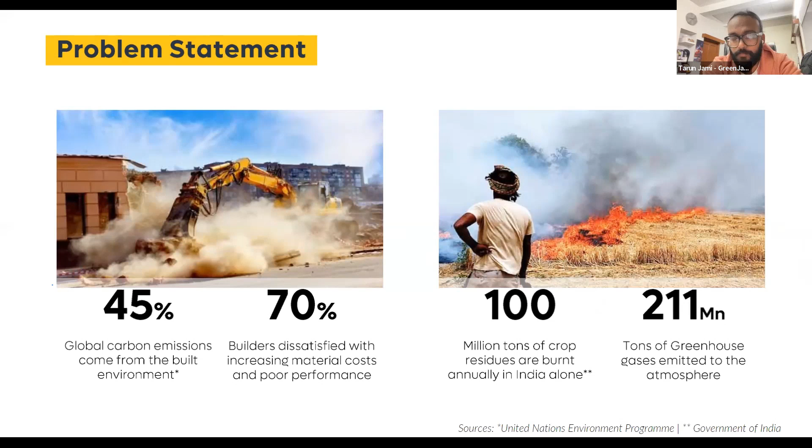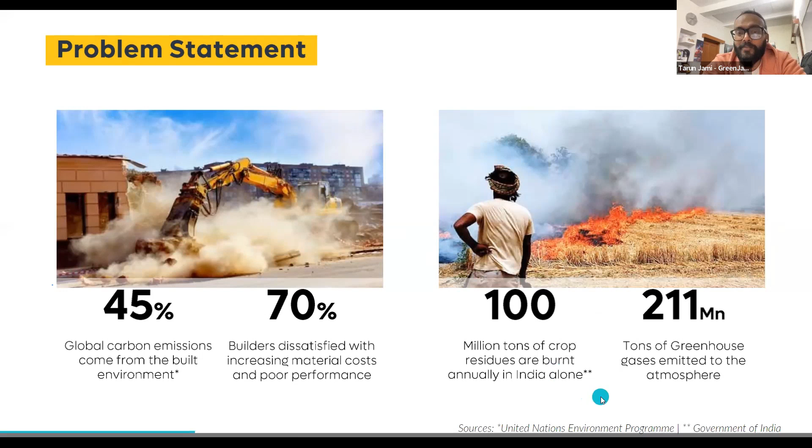So to overcome both problems, we created one solution. We call it Agrocrete. It's a carbon negative building material made using crop residues and the non-toxic, non-hazardous byproducts from steel and paper manufacturing. The background of this slide is a shot from our own manufacturing unit in Roorkee, which was made using Agrocrete blocks. I'll talk about it in the next slides.

So what really is Agrocrete? As you can see, it's available in the form of blocks. What we're putting out in the market are these hollow blocks. They have a cavity within, and they're used for both load-bearing as well as non-load-bearing applications. When you look at high-rise and even low-rise constructions these days, because of heightened awareness, quite a few people are choosing AAC blocks. But they come with a whole host of disadvantages—you have cracks in the walls, you have to treat them well, you have to put these tie beams after every 4 courses, even though it's a non-load bearing application. We're essentially overcoming all of those problems at significant advantage.

One, the strength is significantly higher than 5 MPa. We consistently achieve 7.5 MPa for a hollow block, which is basically in load-bearing territory. And then we have the load-bearing varieties, which achieve more than 10 MPa in strength. But the biggest advantage is in terms of the U value—at 1 watt per meter square Kelvin, it's best in class for a 200 mm thick wall.

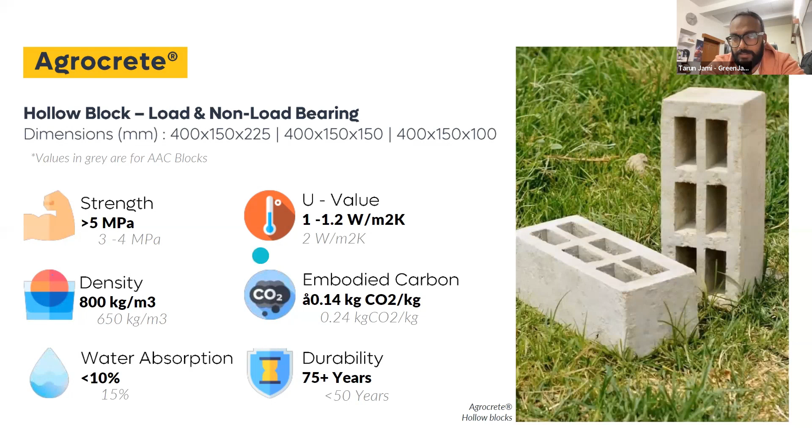So in quality, you're looking at how the construction is done, how the manufacturing is done and how you're keeping it consistent so that you're achieving the same properties, the same parameters. And we're able to achieve that because we use automatic machines where everything is controlled in a factory. We ensure that the exact amount of raw materials are going into it, and therefore the final product is also the exact same.

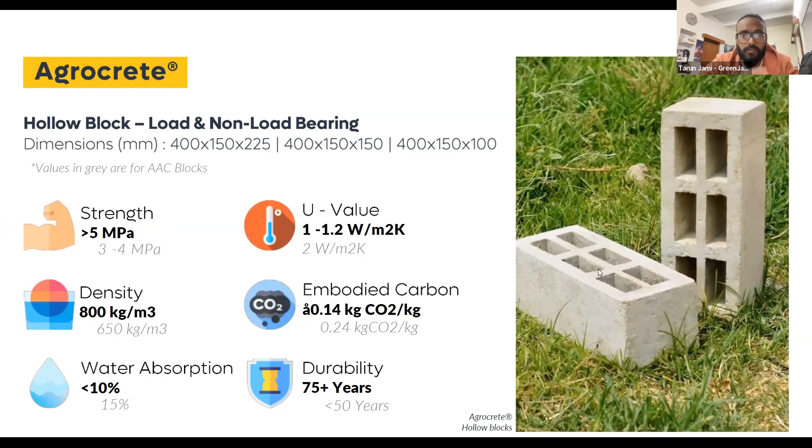We've perfected the technology to a point where it doesn't matter what sort of crop residues we're using. We could use paddy straw, bagasse, cotton straw, corn straw, a whole list of crop residues available to us right now. When it comes to the technical parameters, Agrocrete satisfies the requirements of IS 2185. In fact, it surpasses it. We've benchmarked it against IS 2185 Part 2 and Part 3. Part 3 is for AAC blocks, but that's the most relevant standard that is available to us.

At this point, we're also benchmarking Agrocrete against certain international standards. It's a product made for the globe in India. So we're looking at BS 5234, ISO 7292, and so on. Right. So that's the customer value proposition. The reason anyone picks up Agrocrete over conventional materials is one, because of the larger block sizes, which translate to lesser number of mortar joints.

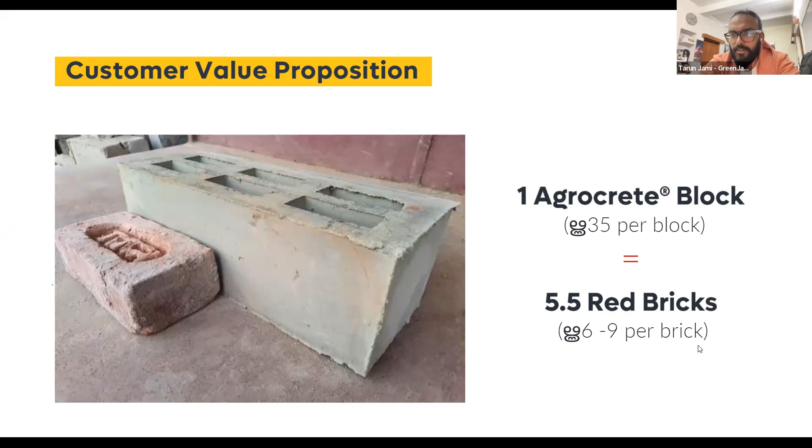And because it's a cavity block, the amount of mortar that you apply onto the outermost face shell is significantly lesser than the amount of mortar you would apply to the whole surface of a solid block. And again, because of the larger block sizes and easier handling, the amount of labor required to make the wall is actually quite lesser. And all of this translates to the next slide, please.

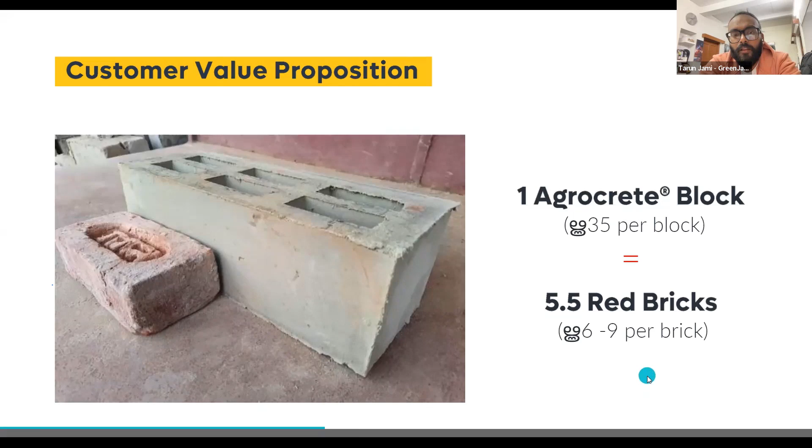So all of this translates to lower cost of construction, up to 50% actually. And so how, is a question, right? So when you look at one clay brick wall, a square meter of it would cost around 2,250 rupees. And this includes the cost of the bricks, the mortar that you put in, the labor that you require, the higher thickness of plaster that you have to apply. All of these things included, even a base coat of paint, that turns out to be around 2,250 rupees.

The same wall, the same thickness, everything with Agrocrete is just 1,250 rupees. So it's almost 50% cheaper. In the future, we're looking at entering the voluntary carbon markets, after which we would be able to transfer some of those benefits, unlocking another revenue stream through the voluntary carbon markets. We'd be able to make this even cheaper.

And beyond it all, because it's a factory-made product, we're also able to achieve customization in the design of the blocks. We're soon introducing interlocking varieties. We're also introducing U-type blocks and so on. All of this while being climate positive, because Agrocrete has a negative embodied carbon.

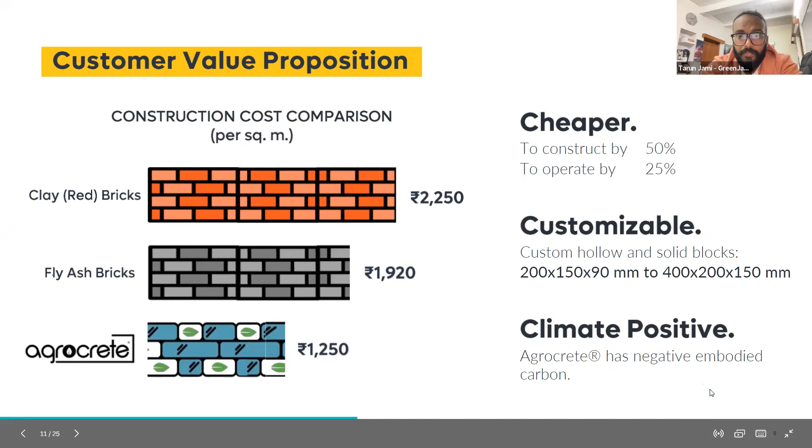The next slide, please. So impact is something that we're very, very passionate about. As you might have noticed from the beginning of the presentation, the reason that we started this company, the reason that we're still passionate about what we do, is simply because of the impact that we're able to drive. For us, it's all about reversing climate change, and you would see that from this particular slide. So one manufacturing unit, which produces about 900,000 blocks per annum, is sufficient to build only about 300,000 square feet of built-up area.

That sort of emissions would occur if you drive a fuel efficient car along the Earth's circumference 463 times. It's a lot of times and a lot of kilometers. Along the way, we're able to achieve 9 out of 17 UN Sustainable Development Goals. The next, please. Is there a question?

Oh, good. All right. So the manufacturing process is actually quite simple. What we do is we first collect the crop residues from the farmers. We chop them up into small particles. And this is where the most critical part of the process takes place. We essentially treat it with hot water.

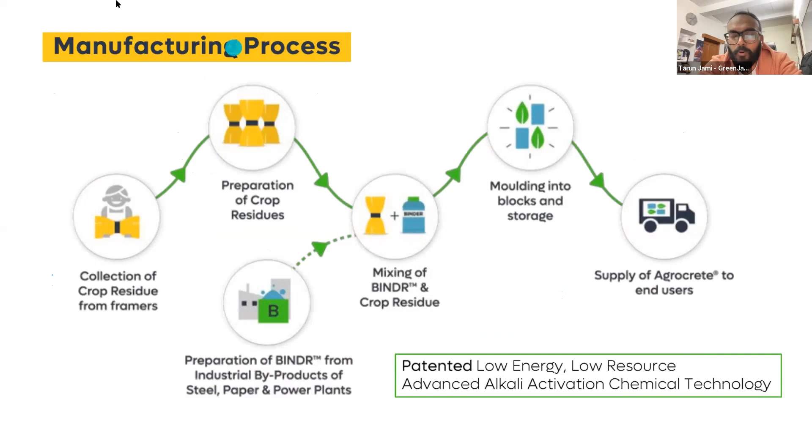And this is extremely important, especially for something like paddy straw, because it comes with a huge amount of fertilizers, chemicals, and pesticides and whatnot, and also a layer of wax which inhibits the setting, the bonding, and everything. So once the crop residues are prepared, we also prepare something called binder in a separate manufacturing unit.

This is a proprietary product by Green Jams, simply made because crop residues and regular Portland cement do not go hand in hand. And we also wanted to avoid the climate impact of cement, which is again very bad. So what we did was we created this amazing ingenious product called binder. It is made from the non-toxic and non-hazardous wastes from steel manufacturing.

So what happens is we basically take the crop residues, the binder, and fly ash, basically any kind of fly ash, be it coal ash, bagasse ash. I mean, there are lots of varieties of ash now available in the market coming from various boiler sources. So we combine all of these three together in a patented mix ratio.

And then we simply compact it in a regular hydraulic block making machine, and we leave it out for a duration of 7 days. There is no heating, there is no water curing, there is no steam curing, no autoclaving, none of those monstrous steps involved.

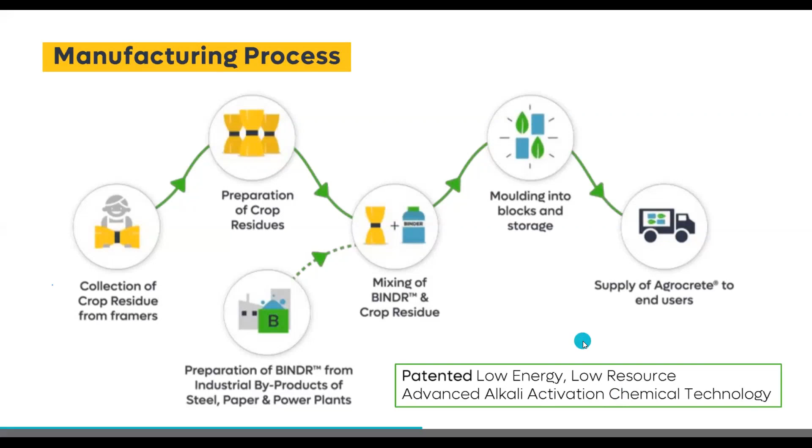Next slide. So yeah, next is a question, Tarun, now that you spoke about manufacturing. Are there any specific construction techniques or skilled labor required for laying out this product on the site? Yeah, so not really. You don't need any specific techniques. These days, every mason knows how to work with a block.

In fact, in all the construction projects that we have done until now, the masons that we hired were those who were only working with red bricks, and it took them all of 5 minutes to know how to switch from your regular red brick to Agrocrete blocks. It's a very simple, very scalable and linear process. You can simply pick up the block and start working with it. All right. Okay. Next slide.

In fact, we're in a very fortunate space where right now we've received beyond 1,500 block inquiries. And the total volume is almost 1.2 crore blocks. That's the sort of volumes that we are dealing with right now. And that's essentially why we're also ramping up our manufacturing capability extremely fast. We're in fact starting a new manufacturing unit in Meerut.

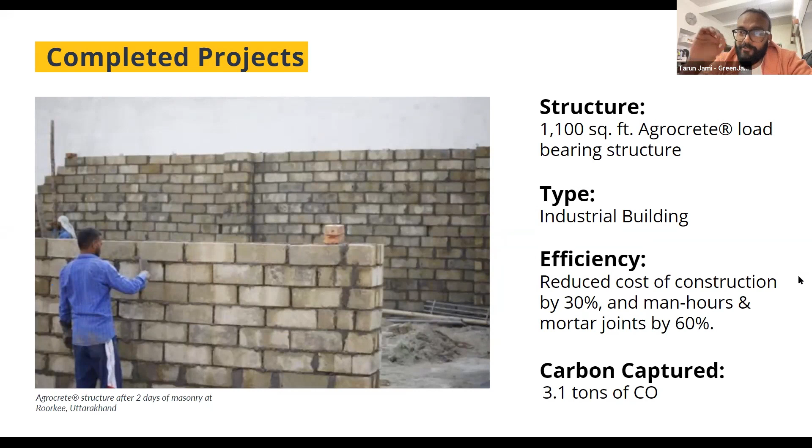And what's interesting is this building was up and functioning in 7 days flat, from the time that we did the first scratch to excavate the land for the foundation to the point that we laid the roof on top. It was just 7 days. That's all it took. The whole structure, the brickwork and everything was completed in 4 days by just 2 masons.

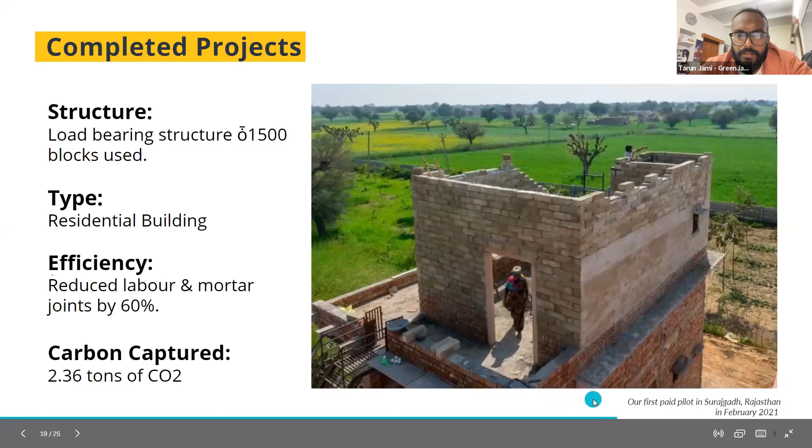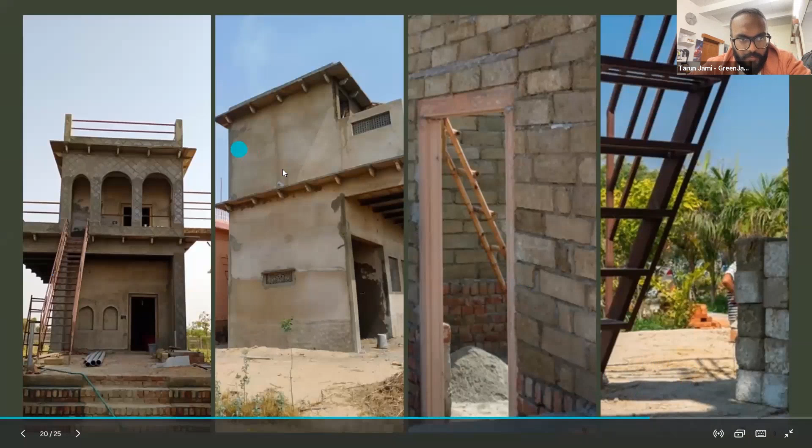The next slide. So these are some of the pictures from the construction site. This first photo was also featured on the Better India. Anyway, let's go to the next slide. Is there a question? Yes, a question about durability of Agrocrete. Yeah, I already mentioned this at the first slide. So we claim a life of at least 75 years. There's nothing to show that this will not last forever.

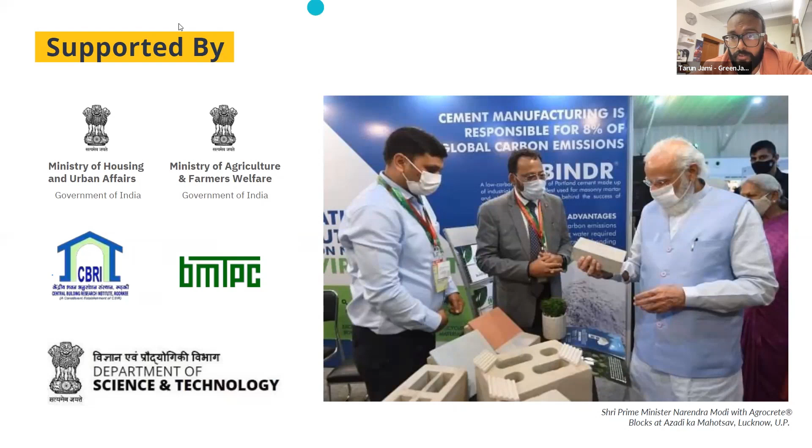Okay, can we take up a question from the chat? Divya is asking, is it water resistant? Yeah, of course it is water resistant. I'd mentioned the water absorption is just 10%. Literally every building material out there has some sort of an interaction with moisture. It's definitely not waterproof or water repelling, but it is water resistant.

There's another question: what are we using for mortar? We use regular cement mortar. There are no changes there. We also have our own product called Binder, which is made using, as I mentioned already, the non-toxic byproducts from steel manufacturing. Yes, right. Someone wanted to know more about Binder. That was the first question. Can we know more about Binder?

So more about Binder. As I mentioned, Binder is this cement alternative made using the byproducts from steel manufacturing, more specifically the slags. At this current point, we're using it as a masonry cement for making mortar joints and for making mortar and plaster. But going forward, soon we would be introducing it as a structural cementitious material.

Okay, guys, you can put up your questions. We're just looking at the organizations that have supported Green Jams so far. Also, can we move to the next slide, Anusha? Yes, cool.

So this is basically almost the end of the presentation. We're fortunate to have been recognized by quite a few organizations, and also received quite a few government grants. Can we take up the questions?

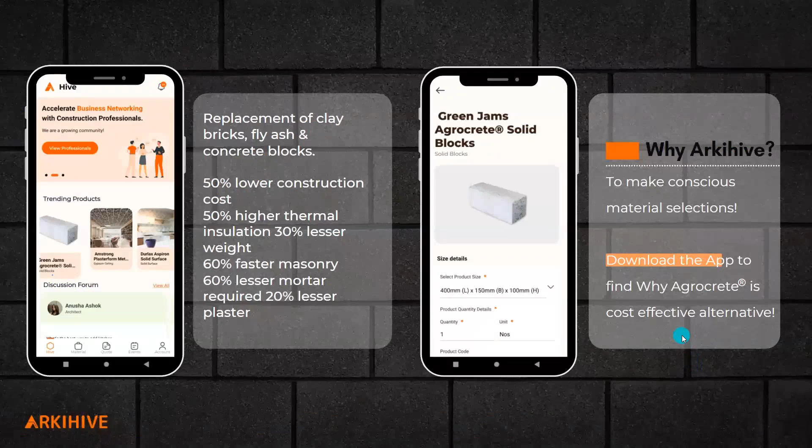Right, yeah, sure. Okay. So, how were the environmental factors considered while manufacturing? After this question, guys, I will update you a little about Arkihive, and then we will take up more questions. I repeat the question, how were the environmental factors considered while manufacturing?

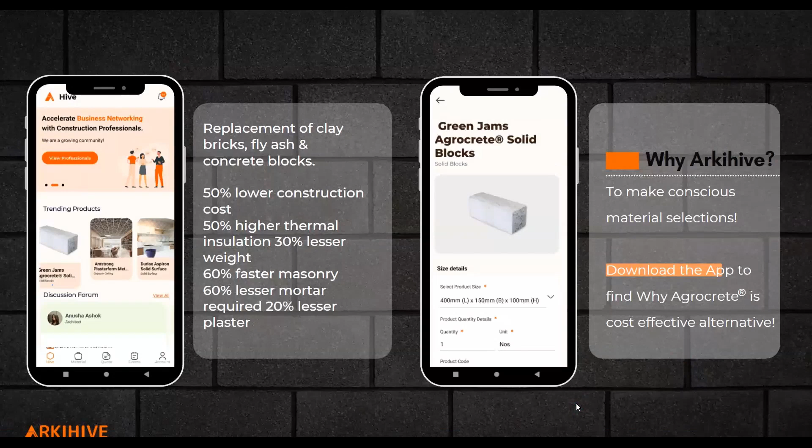The environmental factors, we literally looked at everything, right? So we've done a pretty comprehensive life cycle analysis. As Samriddhi had already introduced me, I'm also doing a PhD, which also entails doing life cycle analysis of products. And I've used all of those skills to look at the whole life cycle of the product. So we've accounted for the scope 2 as well as scope 3 emissions.

While we collect the crop residues, there's a fair bit of mechanization, so we've accounted for the emissions coming from there. Once it comes to our manufacturing unit, there's transportation involved. We've accounted for the emissions there, and obviously the emissions occurring because of the energy, right from drawing the water to the fuel that we use to heat up the water, to chopping the crop residues, to running the exhaust fan, the fans, the lighting and everything. So it's pretty comprehensive in terms of how we've accounted for the carbon footprint.

We have one more question: is the block fire resistant? Yes, I get this question a lot. They're non-flammable, they're fire resisting, and even at 1200 degrees centigrade, they do not go up in flames. There's also a video on our Instagram where I've shot how the Agrocrete behaves at 1200 degrees centigrade using a butane burner. Tarun, you can maybe leave a link to the video in the chat.

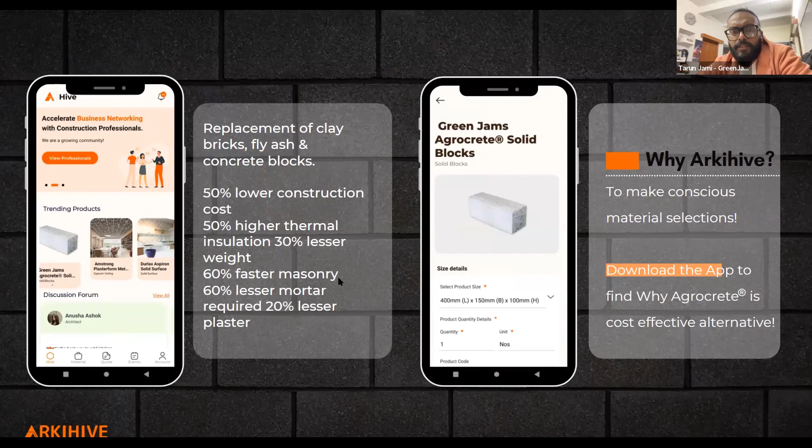Okay. One question is about the weight ratio with respect to red brick. I think you have mentioned that in the sheets, right? Yeah, in the technical comparison I have. So the hollow blocks have a bulk density of around 850, and the red brick is around 1800. So we're looking at almost 50% of the weight of red brick. In terms of AAC blocks, this is slightly heavier by around 200 kg per meter cube.

Okay. How is CO2 being captured? Can you elaborate on how it is being done?

So the mechanism is through the crop residues itself. Everyone knows when crops grow, it happens through the process called photosynthesis, which means that the plant is absorbing CO2 from the atmosphere, converting it using the power of light and water into various products. Some of it includes things like cellulose and other organic compounds, which form the body of the plant. So that's essentially what we do.

We collect the crop residues and we do not burn it, nor do we subject it to any other process where essentially the plant itself is converted into compounds which again escape into the atmosphere. So that's essentially the carbon capture mechanism, because we're taking the crop residues and entombing it within a mineral matrix. That essentially is the pathway for carbon capture.